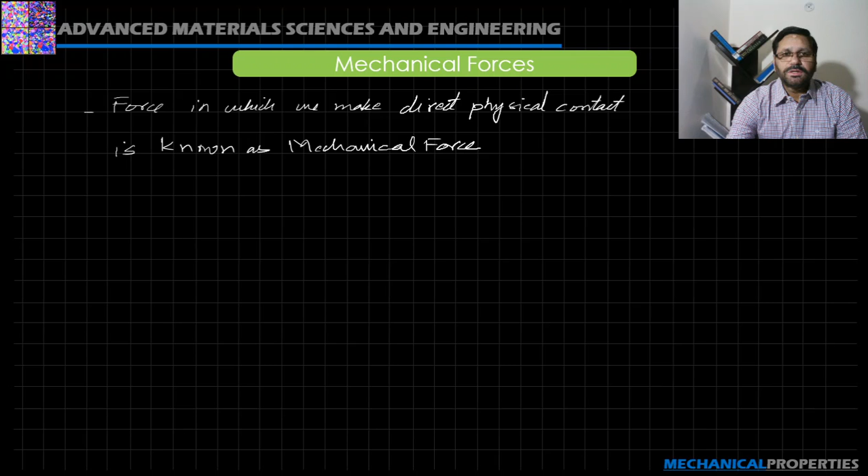Let's say we have a specimen and the application of force is like this. The force is pulling in nature. So by virtue of this type of loading, the body experiences the stretching, expansion, or we may say extension. And these kind of loadings are termed as the tension.

Now we take another loading condition using same specimen. The loading is pushing in nature. So due to this loading, the material experiences the contraction or compression. These kind of loading conditions are termed as the compression.

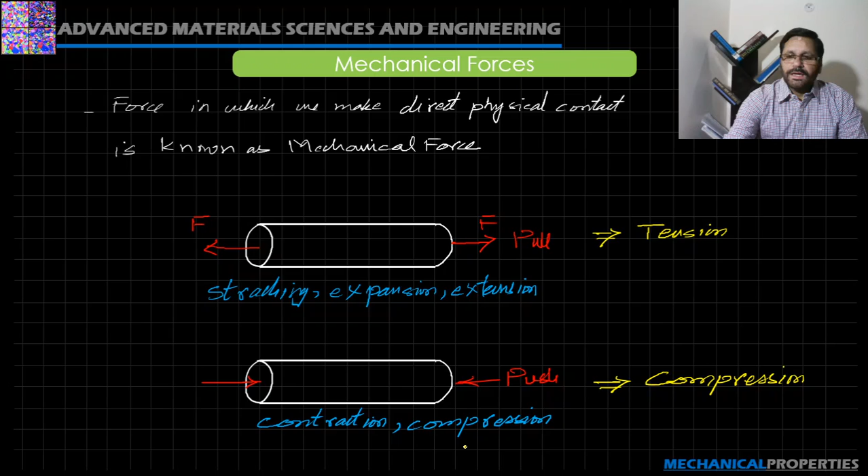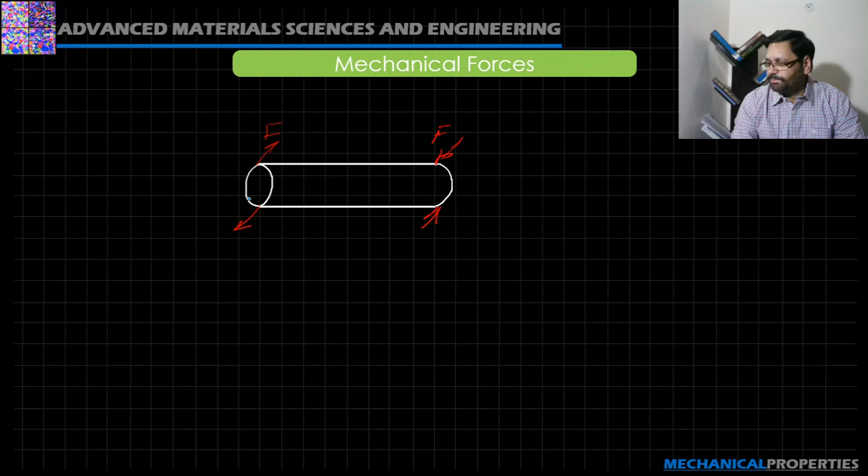Now take another example. In this, the loading condition or the application of force is like this. So here we have the couple of forces, means torque, this is the distance, d, and these kind of loading conditions are termed as the twisting or torque.

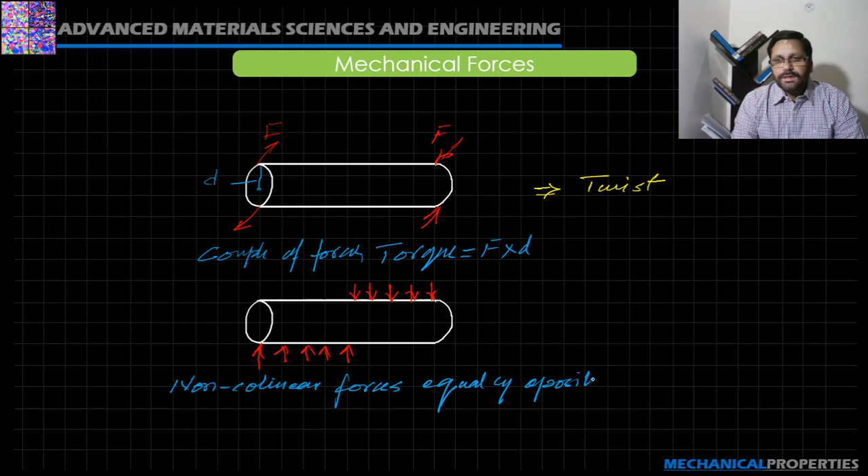Similarly, we take another example on same specimen but the application of force like this. Here the non-collinear forces, but equal and opposite in direction, which causes the break, cut or shear of the specimen, and these type of loadings are termed as the

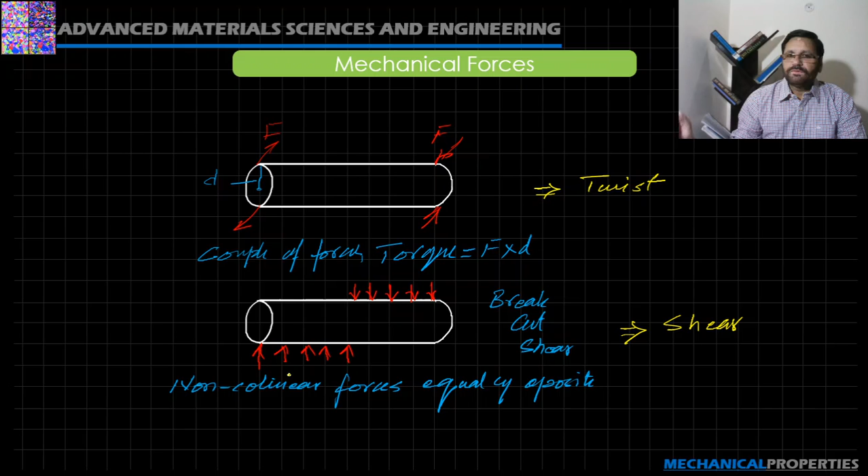shear loading conditions. Now upon application of external mechanical forces, the molecules of the body resist to any change, and due to these resistive forces the stresses are produced within the body. Now the easiest and the quickest way to know the several mechanical properties of the material is using universal tensile machine. This is one of the universal tensile machines in which the specimen is fixed between these two jaws.

Now these are the jaws and the specimen is fixed in these two jaws, and the stress strain behavior or the curve is plotted using these computers. Now as far as the specimen dimensions are concerned, as per ASTM standard E8, the specimen dimensions could be like this.

Now this is the gauge length which is marked, and this is the gripping section where we can simply use this section to grip into the jaws of the machine, or we may have hole in the specimen to use pin for the holding of this specimen. Further, you can visualize that here instead of having the sharp cut, we have some curvature so that the additional stress concentrations are not produced in this material, and we know the exact stress and strain behavior of this specimen. So this is the gauge length.

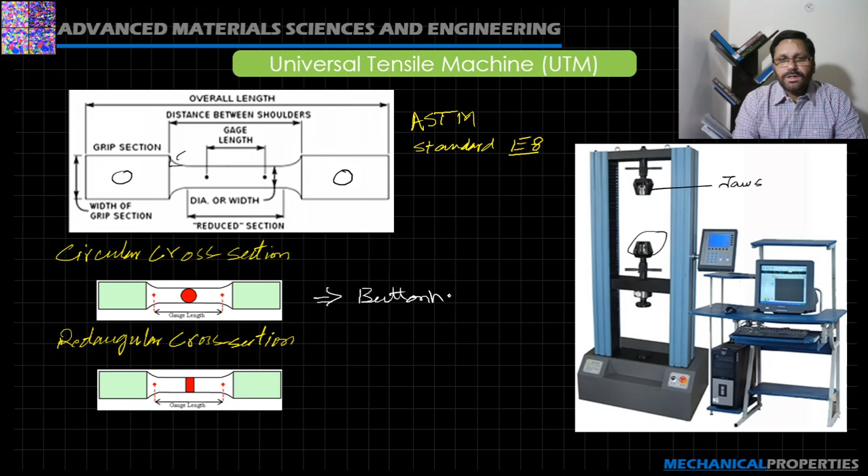Further, the specimen may be of circular cross section like this, or maybe the rectangular cross section, and this circular cross section specimen is also termed as the button head specimen, and this rectangular cross section is also known as the

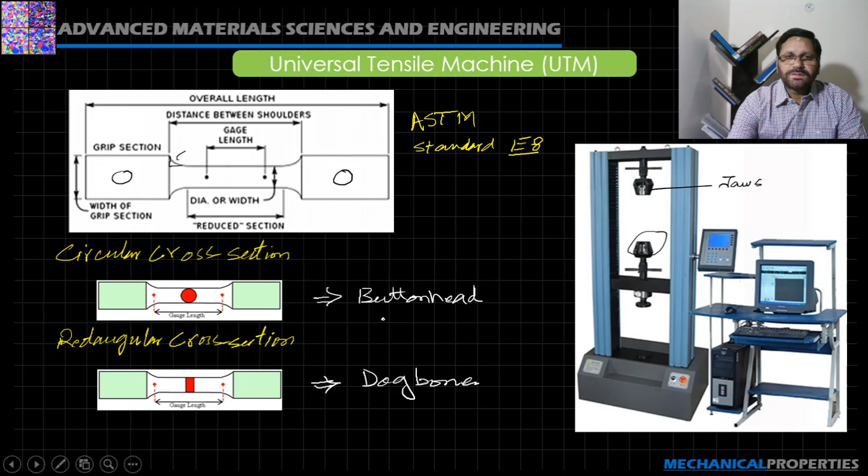dog bone specimen. Now using these specimens we can calculate the stress and strain of this particular material. Let's say this is the same specimen and in this specimen the application of force by using these grippers in the jaws, if we are taking the loading of tensile. Now in this specimen, this is the gauge length L0, or the initial length of the gauge.

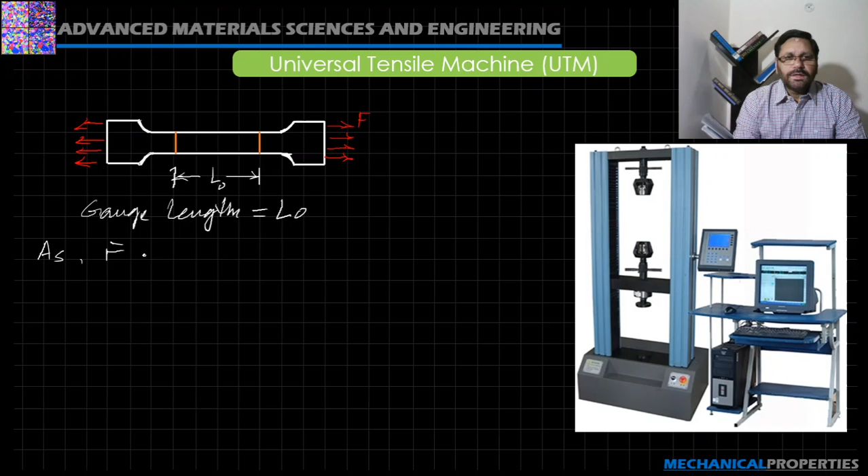Now as the force increases, the change in length from the initial length L0 to an instantaneous length L, it starts stretching. Now this is the elongation, the change in length.

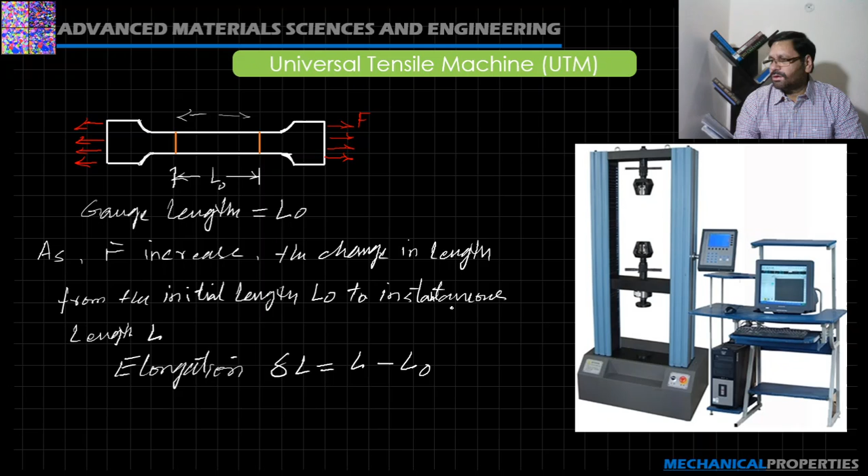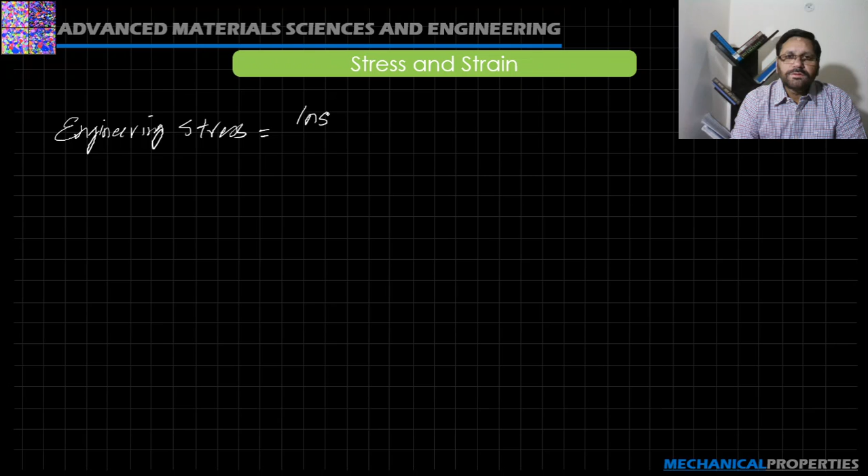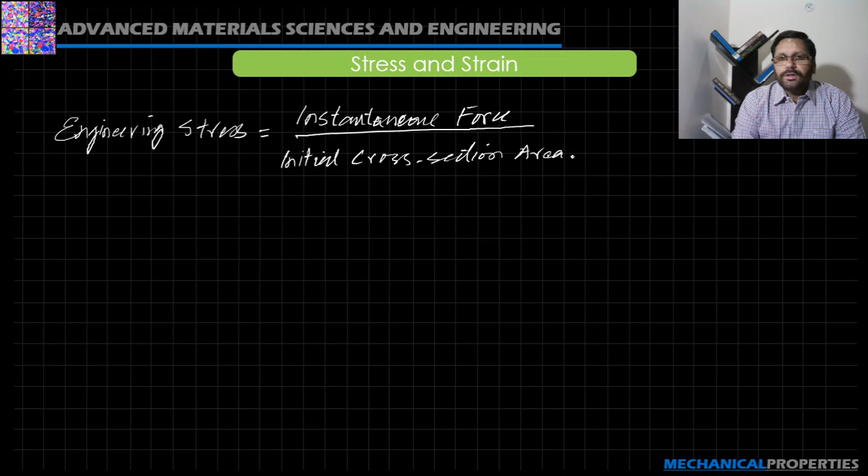Once the material is under tensile loading, which is del L, L minus L0. Now further we can calculate the engineering stresses. These are instantaneous force upon the initial cross-sectional area of the specimen.

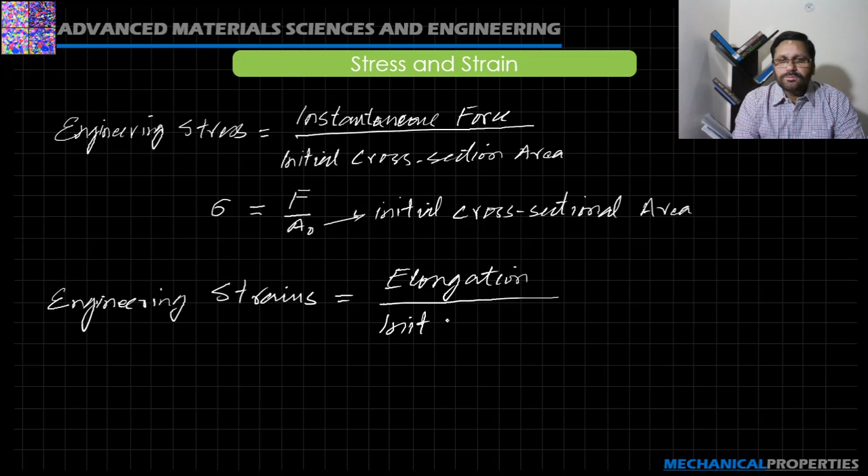Since stresses are denoted by sigma, instantaneous force is F, upon A naught, the initial cross-sectional area. Similarly, engineering strains can be made by this expression, elongation divided by the initial length, that is the gauge length.

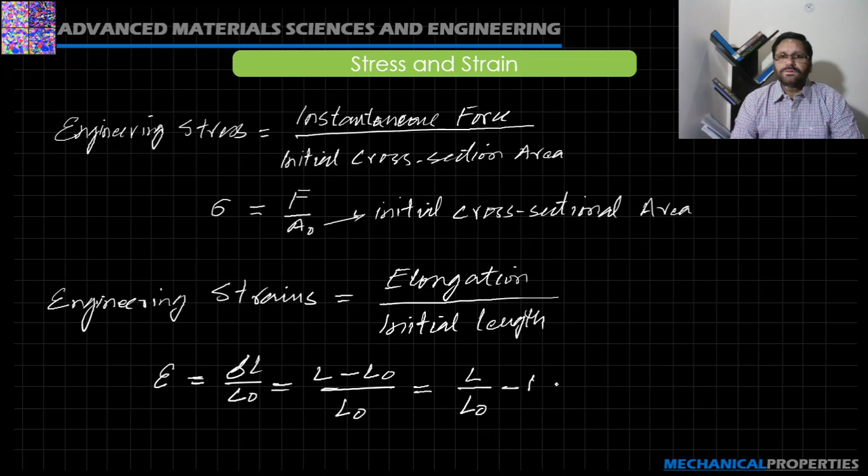So the strains are represented with epsilon, epsilon is equal to del L over L naught, or L minus L naught over L naught, or further we can write this L over L naught minus 1. Now with this we end our discussion here.